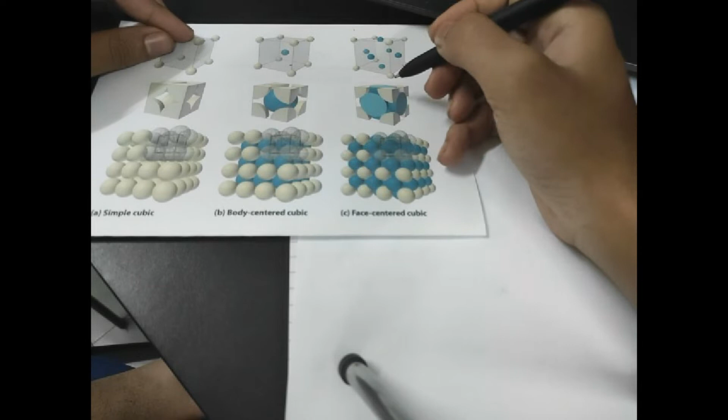Satu kubik ini akan mengandungi empat zarah. Maknanya ada 4 sfera. Kenapa dia ada 4, adalah di atas separuh hemisfer dan bawah separuh. So bila digabungkan akan jadi satu sfera, dan pada bahagian depan dengan belakang jadi 2 sfera, bahagian tepi dengan sebelah belakang akan ada 3 sfera, dan setiap bucu ni jika digabungkan akan menjadi 4 sfera.

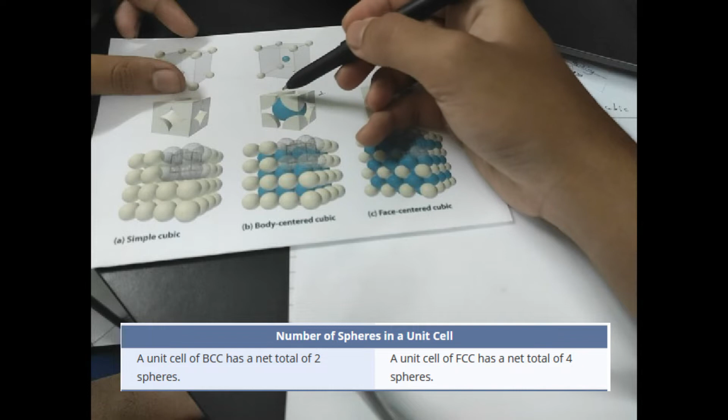So perbezaan antara BCC dan FCC, FCC mempunyai 4 sfera dan BCC mempunyai 2 sfera. Dan BCC adalah body center cubic di mana zarah utama berada pada keadaan tengah. Maknanya zarah yang sempurna berada pada keadaan tengah.

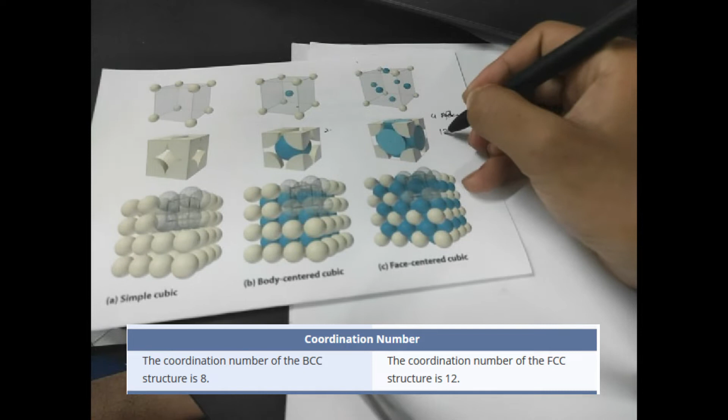Okay, perbezaan yang ketara pada keadaan BCC dan FCC adalah coordination number, di mana FCC mempunyai 12 struktur, dan BCC mempunyai 8 struktur.

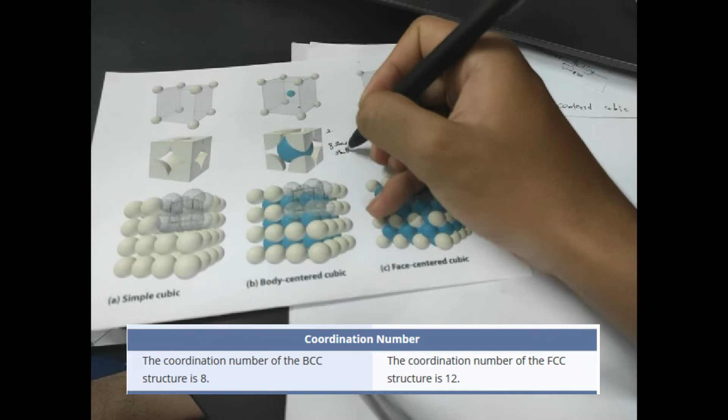Okay, dan seterusnya adalah packing factor. Packing factor untuk FCC adalah 0.74. Kenapa 0.74? Adalah 74% daripada kubik FCC dilitupi oleh sfera itu sendiri. Dan untuk BCC hanya 0.68, di mana 68% sahaja litupan kubik itu dengan sfera itu sendiri.

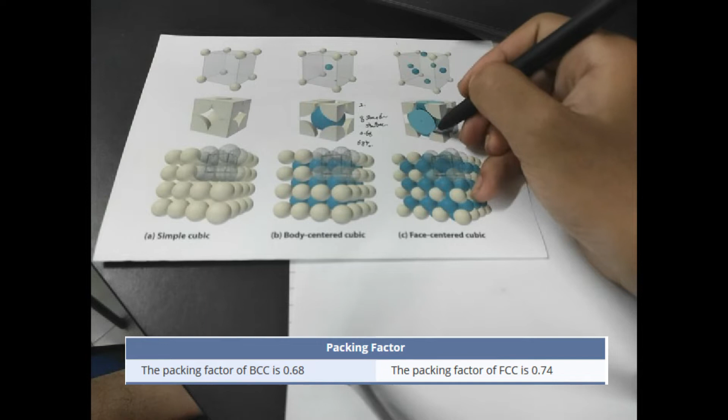So maknanya FCC mempunyai ruang litupan yang paling tinggi kerana permukaan muka menghadap kepada kubik lebih besar.

Dan contoh kepada FCC adalah aluminium, kuprum, emas, plumbum dan juga nikel.

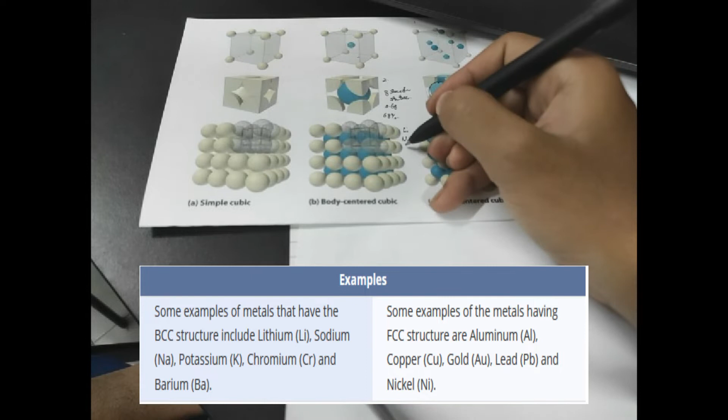Dan untuk BCC adalah lithium, sodium, potasium, kromium dan juga barium. Ini adalah contoh-contoh

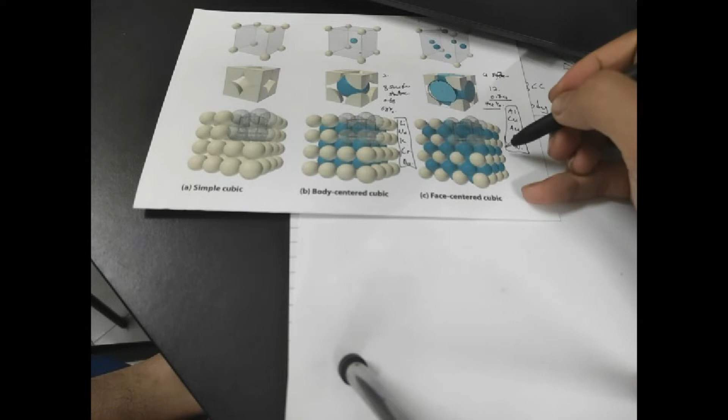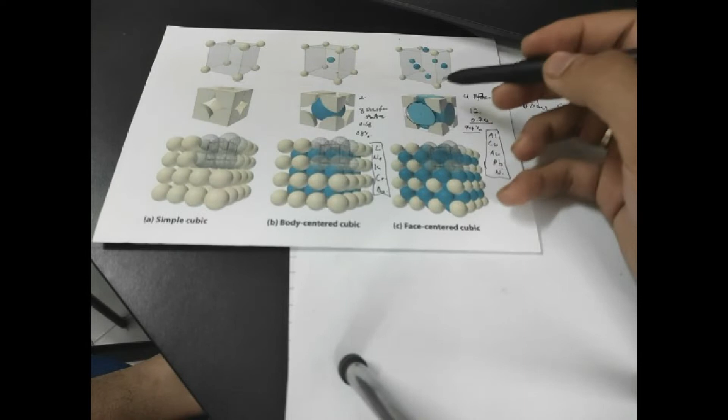crystal structure untuk FCC, dan ni adalah contoh crystal structure untuk BCC. And then ini adalah susunan untuk FCC jika kubik ini digabungkan menjadi satu bentuk metal yang sempurna. Okay, jika dapat dilihat, sfera utama berada pada keadaan luar.

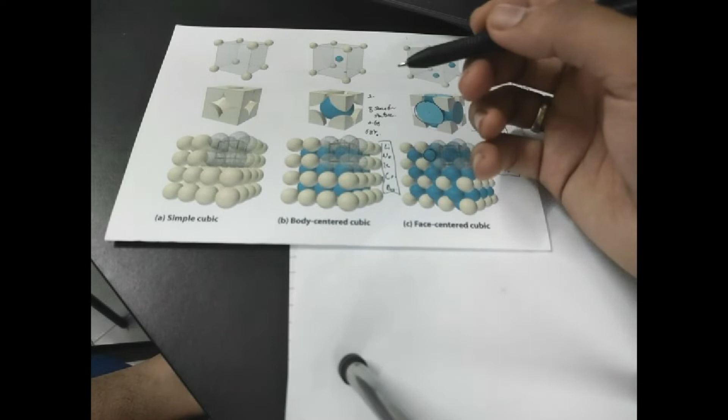Dan untuk BCC, jika dapat dilihat, sfera utama berada pada keadaan tengah dan ditutupi oleh sfera pada keadaan luar.

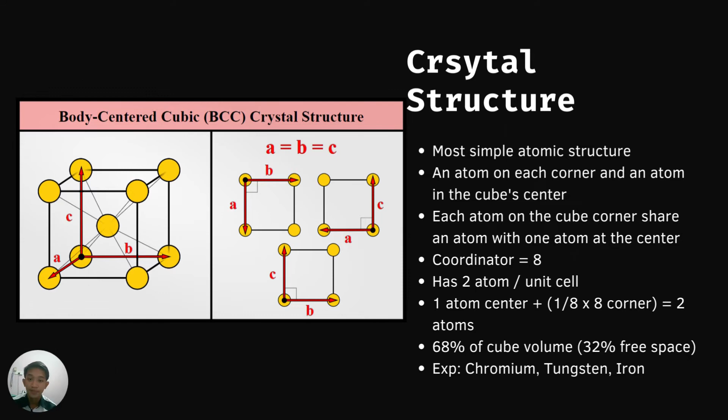In this part, I will present about the crystal structure of hexagonal close pack, which is HCP. So HCP is one of the most stable crystal structures and has the highest packing density.

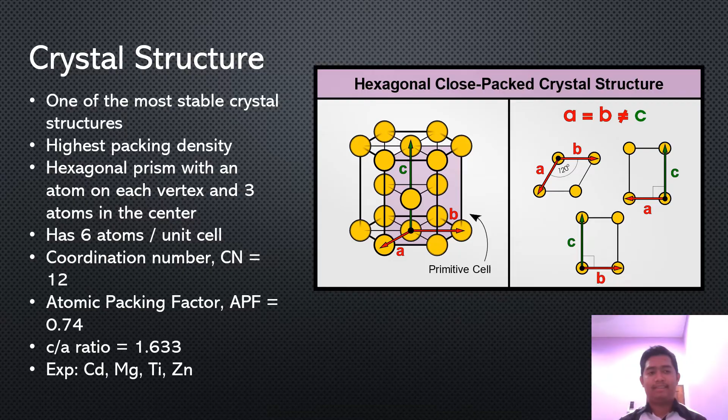Next I will explain the mechanical property differences between BCC, FCC, and HCP.

BCC material is basically less ductile, meaning it has a lower degree of plastic deformation. BCC is also less malleable, meaning it cannot accept larger stress or being hammered without cracking or breaking. However, the good thing about BCC is that it is hard, and hard materials are usually used to make tools or cutting tools, like drills or drill bits. Another point is good strength, but the strength of BCC depends on the length of the bond. The shorter the bond of the atom, the greater the strength of the BCC material.

Next we go to FCC, face-centered cubic. FCC has higher ductility than BCC, and also has good strength and good toughness. The atoms of FCC are more stable at higher temperature. Besides, FCC also has higher density compared to other crystal structures.

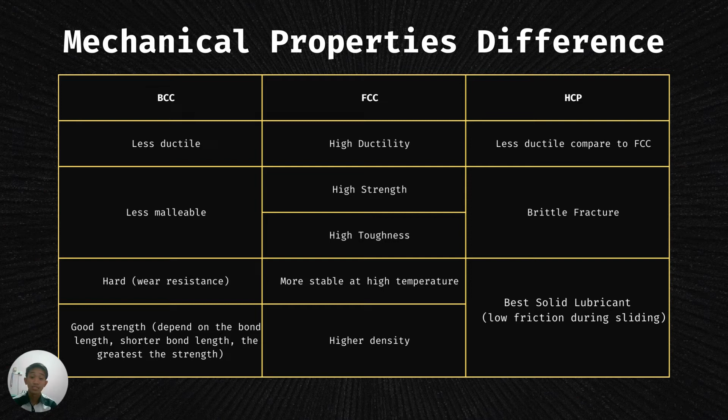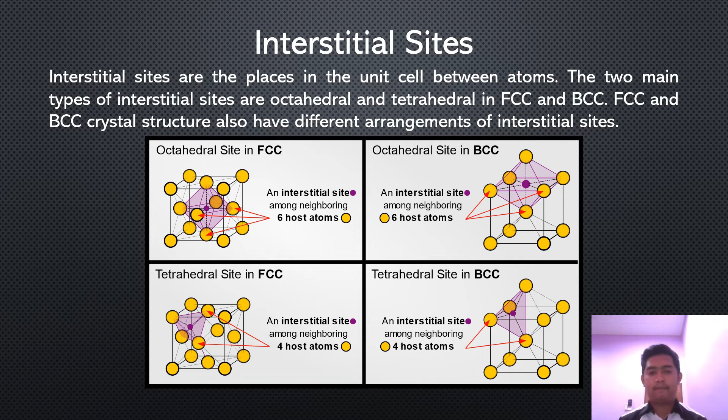Next, this is the interstitial site radius, R, in BCC, FCC, and HCP. For the octahedral interstitial site radius, BCC is 0.155R, where R refers to the radius of an atom. For FCC and HCP, the octahedral interstitial site radius is 0.414R. This shows that the octahedral interstitial site radius for FCC and HCP is bigger than BCC.

Next, the tetrahedral interstitial site radius for BCC is 0.291R, and for both FCC and HCP it is 0.225R. This shows that the tetrahedral interstitial site radius for BCC is bigger than for FCC and HCP.

For the cubic interstitial site, the radius is none, because BCC, FCC, and HCP have no cubic interstitial site. Lastly is the fraction of a cell's volume occupied by interstitial sites. For BCC it is 10.81%, and for FCC and HCP it is 6.94%.

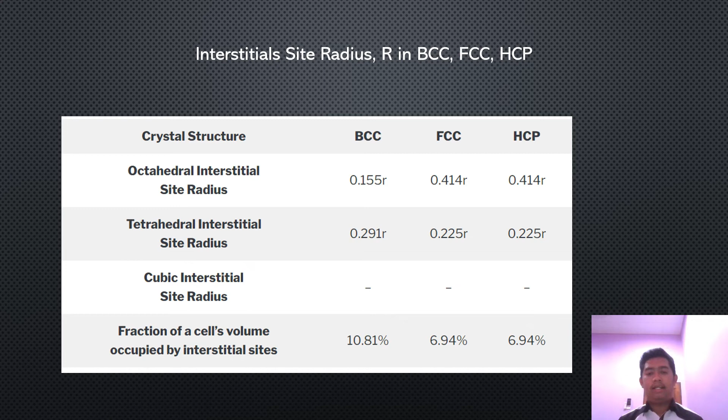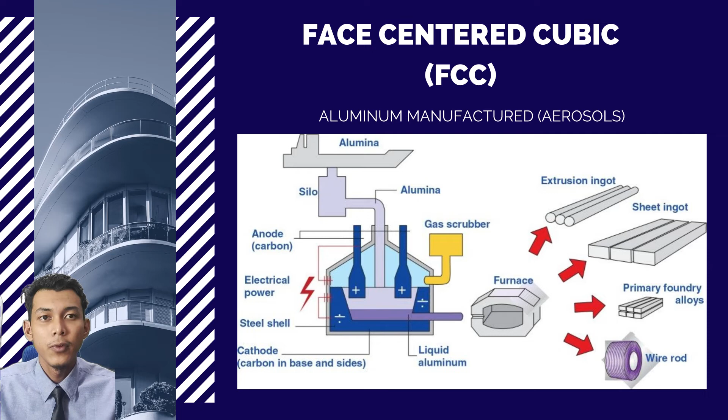There are many manufacturing industry processes based on FCC, BCC, and HCP, but today I will show you one example from each. First, for FCC, we choose the aluminum manufacturing process, which is aerosol. As you can see in this example video of the aerosol manufacturing process regarding FCC.

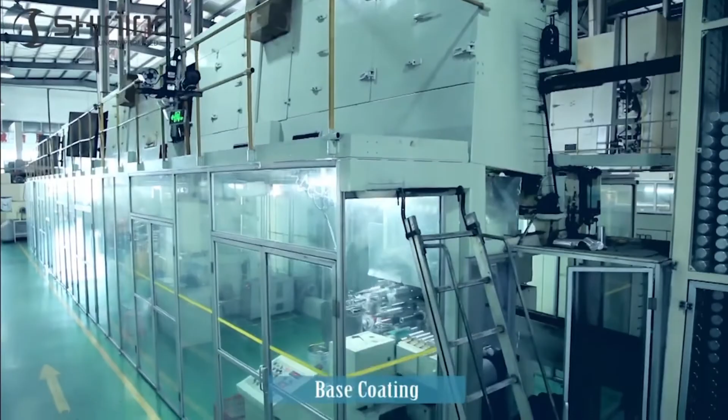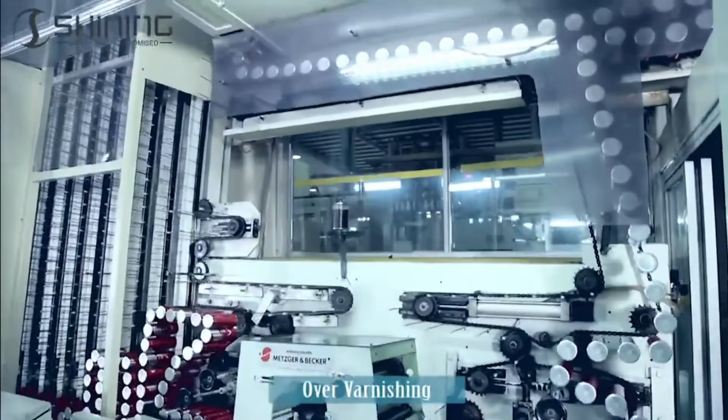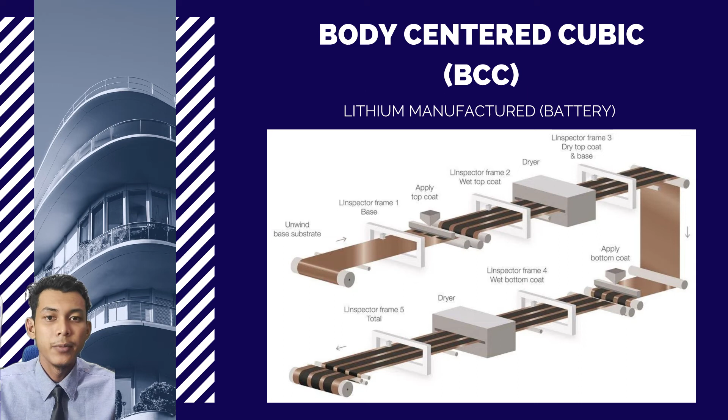Second, for BCC, we choose the lithium battery manufacturing industry process. This video shows you the process of how to make a lithium battery.

Last but not least, for HCP, we choose the titanium element. Today, many manufacturing industries, like aerospace, use titanium as a primary material because it is strong and durable.